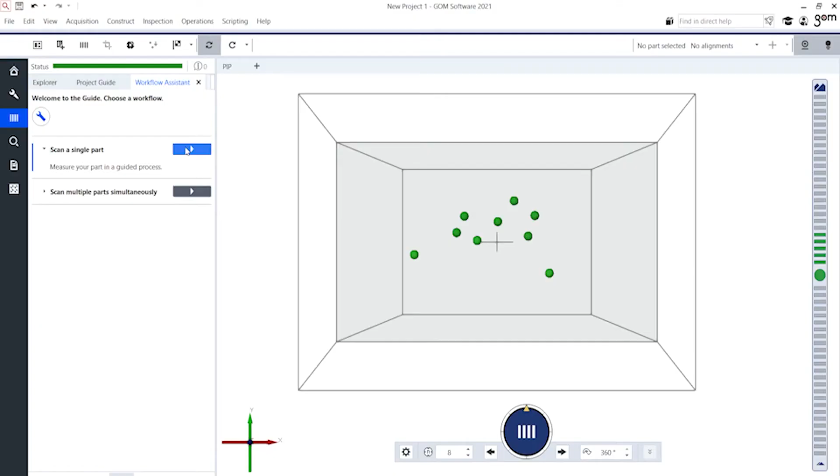Once you select the workflow, the software guides you through the next possible steps for your scanning process. As our rotation table already has reference points on it, for the first part of the workflow, the software will measure these reference points for us.

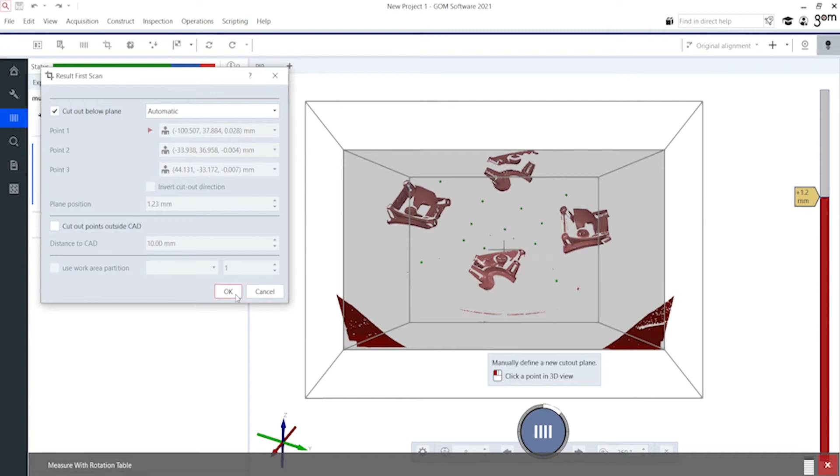Now that our reference points have been measured, we can measure with the rotation table. We set the rotation table to the appropriate number of rotations and begin the scanning process. As we're used to, after the first scan, the software automatically cuts out the background plane. All we need to do is confirm this selection, and the top side of the parts will be measured.

Within the Workflow Assistant, the software can determine how many parts you're measuring and partition the working area automatically. In the software, you see the defined areas for each of our parts.

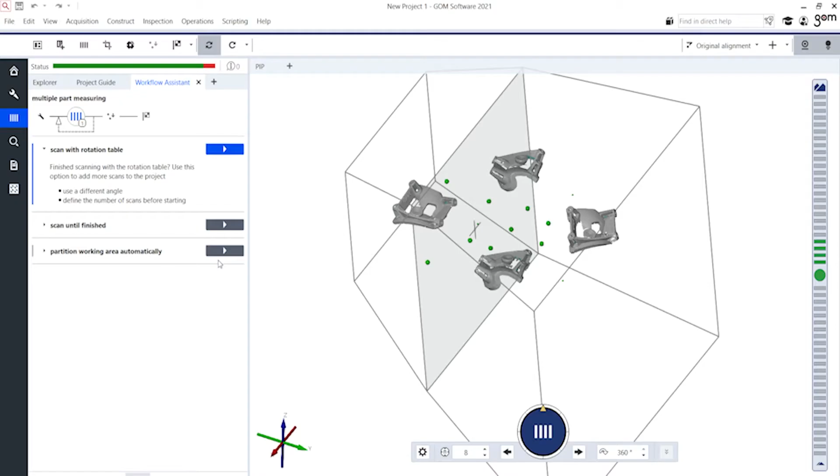Now that we've scanned the top side and separated our parts, we can flip them over to scan the second side. To ensure that you place the parts in the correct position, the software uses augmented reality to assist you. With the parts flipped, we'll scan the rear side with the rotation table.

Even though we did not use any reference points on the parts at all, the software can still automatically align each of our 4 parts together based on the part's geometry.

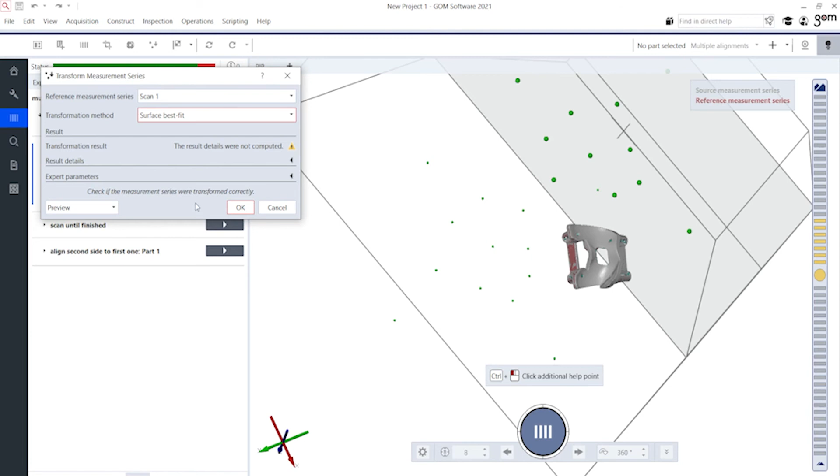With each of our scans properly aligned, we can polygonize our data, and just like that, we've scanned all 4 of our parts at once.

These scans can then be used for further tasks such as trend analysis or creating a golden mesh. You'll find more details about these possibilities in the Getting Started videos for GOM Inspect.